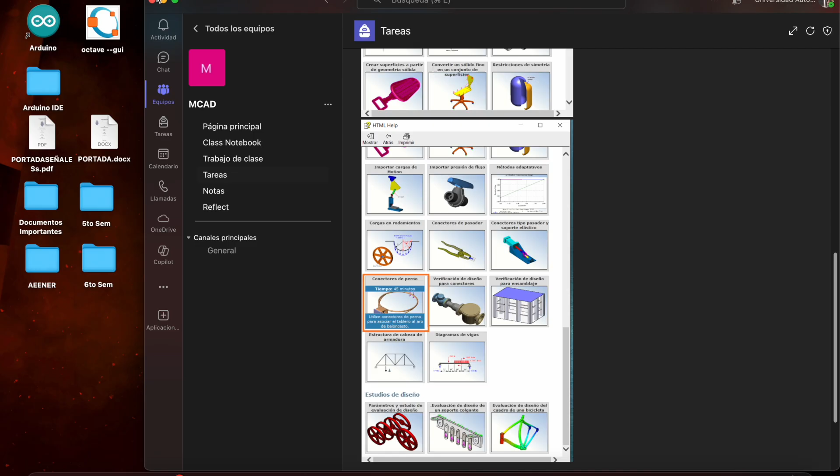I'll show you the second tutorial, bolt fasteners, with the basketball rim. During the basketball rim tutorial, we actually have to go through the whole process of the first tutorial, kind of.

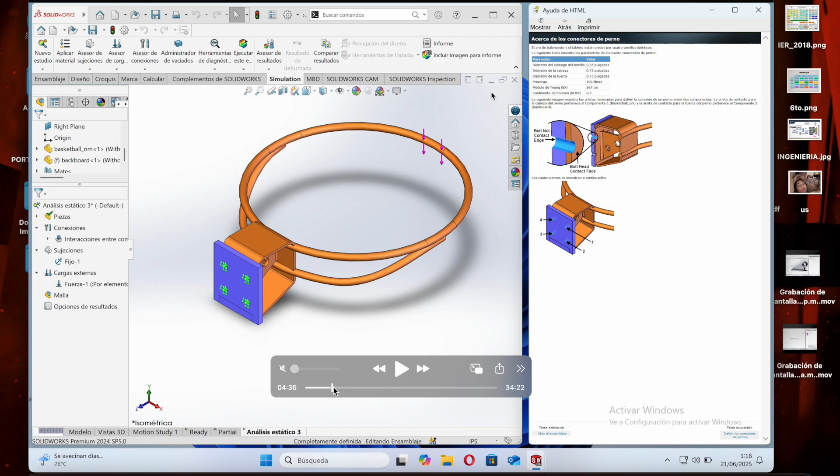First, we have to declare the force that is going to be applied, and we have to declare the holes too. But it's not actually stated during the tutorial, so you have to remember and learn it yourself. Then I have to declare the parts of the bolts using the data they give us.

And then repeat it for all four of them because they're exactly the same. And then here I have a problem, I did it wrong, and then I fix it.

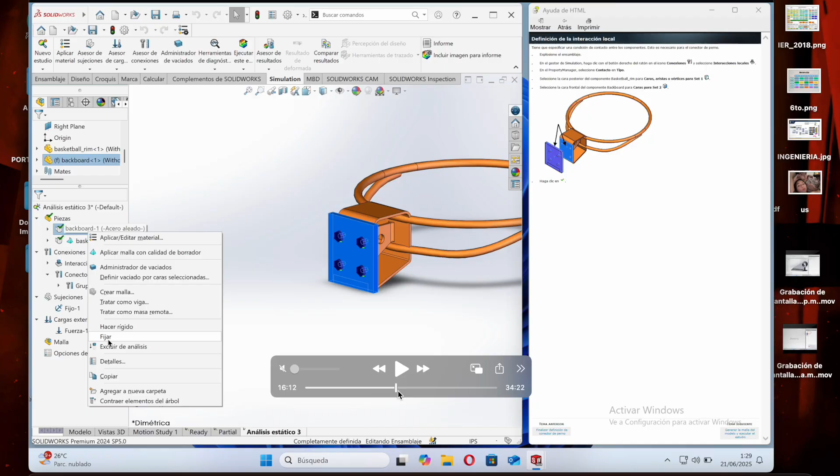After that you have to make the contact. We have to declare the contact of these two pieces, that is the rim and the base. I had to figure it out.

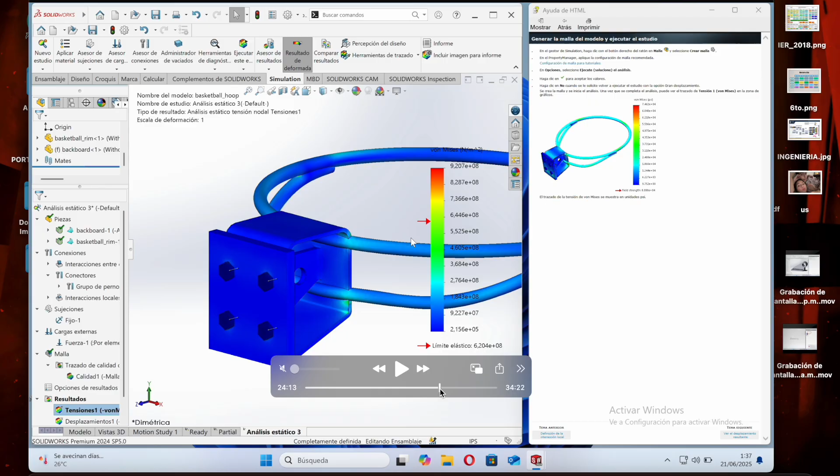Then we also come back to declaring how many of these triangular pieces are going to be making our simulation, and we have to run the tension simulation and the displacements.

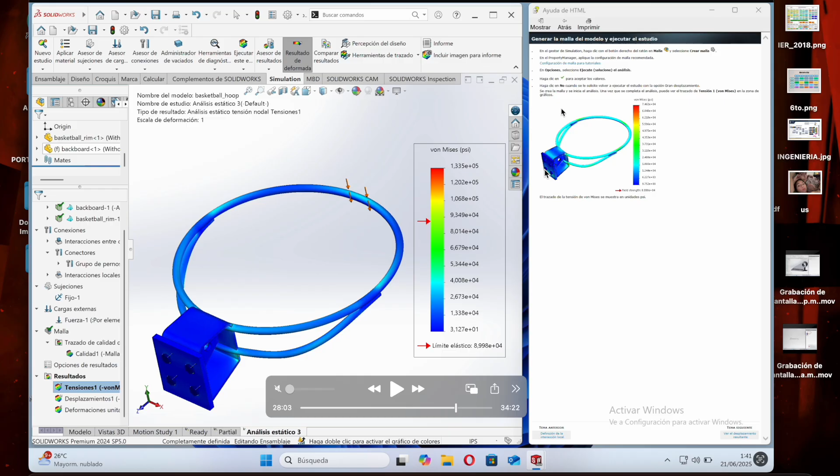Here we can see that I changed it to PSI, and we can see that the yield strength, or the elastic limit as it says in Spanish, is the same as the tutorial. And even though the colors aren't the same because the range is different, the results are actually the same as the one shown, and the displacements do the same thing.

Now here we have to take the forces applied to the bolts.

A really important thing is that it's going to be the same for these two because they are symmetric, and it's going to be the same for these bottom two too.

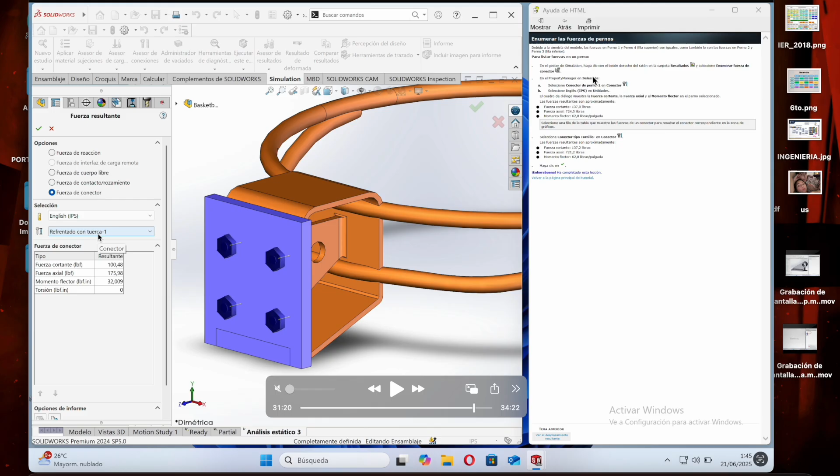Because they're also symmetric. A very important thing to say is that even though the results here do not match, I checked and double and triple checked, and I didn't do anything wrong with the creation of the bolts nor with the actual pieces or anything. So I do not understand why it's not the same between these two, but I would take a guess and say that the tutorial was wrongly made.